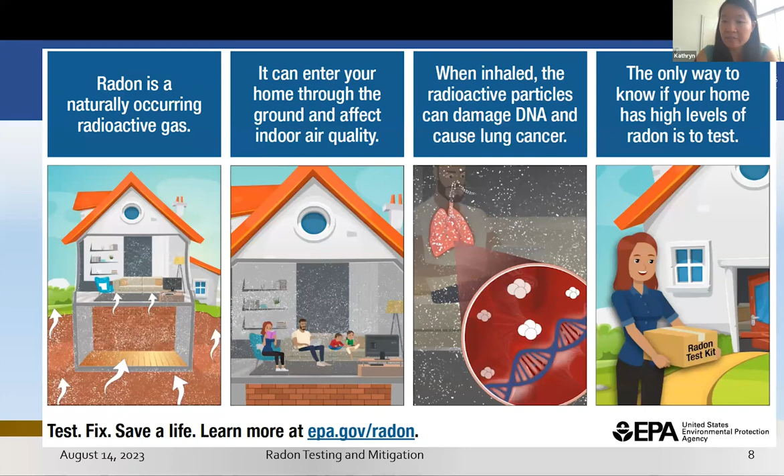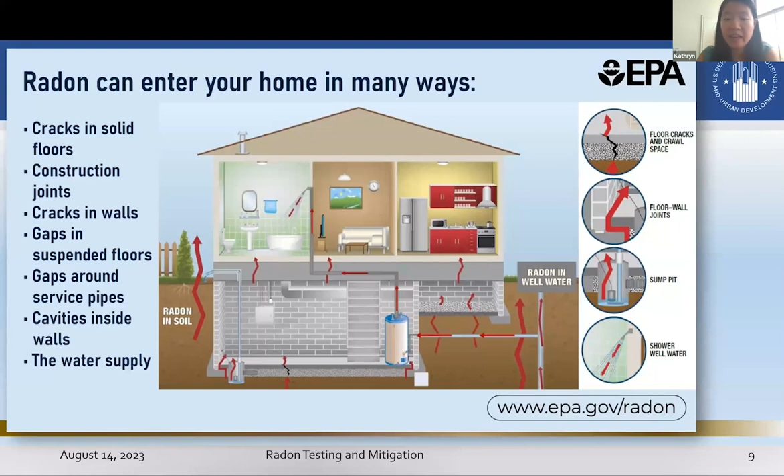How to test for radon. Last time we went over, there are short-term tests, long-term tests, and continuous radon monitors. Short-term and long-term tests can be bought commercially for $20 to $40, including the lab fee. If you buy them in bulk from labs, you can even get it down to under $10 per test.

Continuous radon monitors are professional devices that are much more expensive, upwards of $800, double or triple that, depending on the device and model. The household or layman monitors that you might be able to buy online for $100 to $200, those are not devices that are approved by the National Radon Safety Board or the National Radon Proficiency Program. And so the accuracy of those devices is questionable. And so you wouldn't really want to base your mitigation decisions on those lower cost digital devices.

There are many different technologies for short-term tests and long-term tests, such as alpha track or charcoal canisters, electret ion chambers. They all have their pros and cons. There were a bunch of questions that came in on which ones are more accurate, which ones are better than others, which ones would you choose? And really, you just follow the manufacturer's instructions for operation. Some tests you have to operate for at least 5 to 7 days. Many of them can be affected by humidity and temperature extremes. So just follow the manufacturer instructions and follow the standards that we will go over in today's webinar, and then you will get a more accurate result.

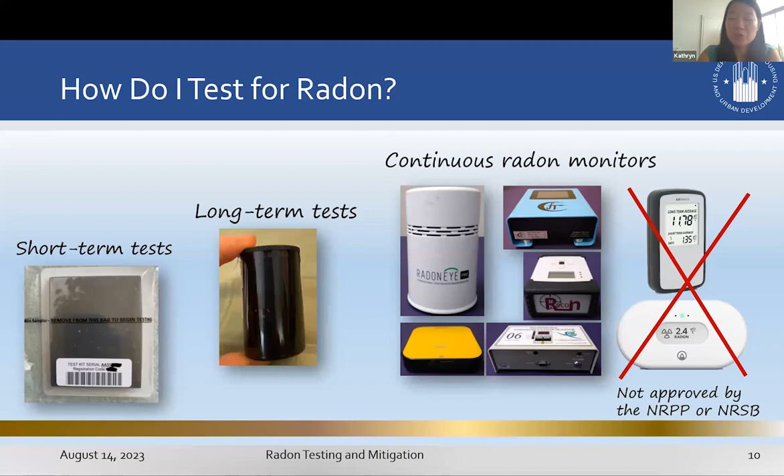What do the results mean? 0 to 2 picocuries per liter, you would just retest every few years. It's basically a normal background level. If you're between 2 to 4 picocuries per liter, you should consider fixing, because at that rate, especially above 2.7 picocuries per liter, is when you start seeing increased risks for lung cancer.

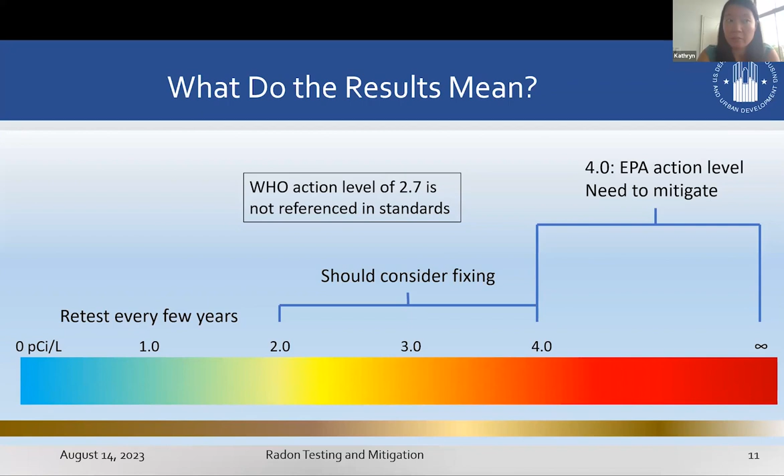The World Health Organization action level of 2.7 is not referenced in the national standards, so you don't need to go by that 2.7 number. It's just something to keep in mind. So you could consider fixing, but you're not required to. And then the EPA action level of 4.0, if you're above 4.0 picocuries per liter, then for health and safety purposes, you should mitigate the building.

Certification bodies that certify testers, mitigators, list approved devices, provide training. There are 2 of them. One is not better than the other. You can do either. That's the National Radon Proficiency Program, or NRPP, and the National Radon Safety Board, NRSB. And then I've included links to a list of approved testing devices that they recommend.

Last webinar, I went over the state radon fact sheets that are provided by Kansas State University's National Radon Program Services. Here is an example of a state radon report card, which is provided by the American Association of Radon Scientists and Technologists. So similar information, just a very short fact sheet, one page with some infographics, really useful on the bottom left, the statewide radon policies.

So, does your state require credentialing to do testing or mitigation? Which standards are in effect? Do you need to notify or disclose to the home buyers or potential home buyers any radon test results, things like that? And you can see here from Minnesota, they basically have requirements for all of them except for school testing and school mitigation.

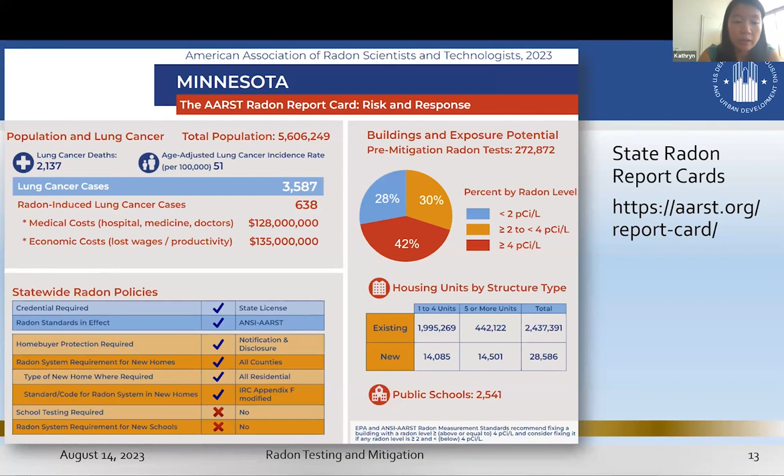Okay, another audience poll just to see if you guys got the most important thing from last webinar. Let's say you live in Savannah, Georgia, which is zone 3 on the EPA map of radon zones. Does this mean that your house will have low radon levels? Yes, so testing isn't necessary, or no, the only way to know is to test. Okay, so most of you got this one.

Great. This is really the most important thing from the last webinar, is that the EPA maps of radon zones are not accurate to an individual house level. They don't really tell you about your individual risk. For some counties or jurisdictions, there has been more research into the development of maps that are more based on soil types and soil uranium sources.

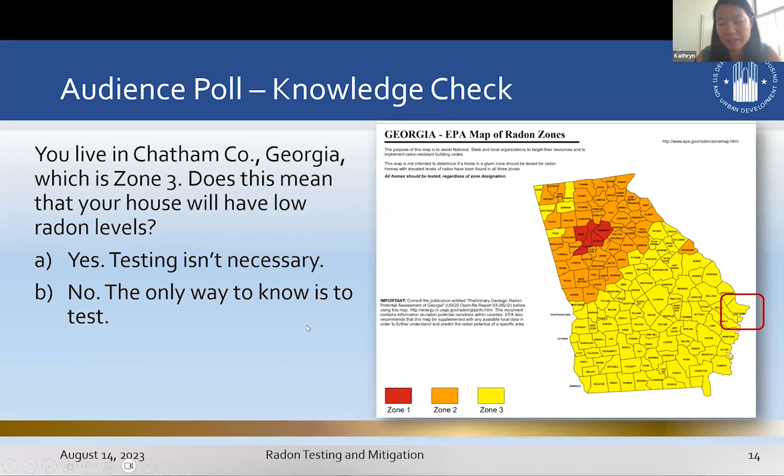And a couple of counties in California or maybe Utah, we saw some examples last time. So that might be better information that you could use, but definitely don't use the EPA radon maps because they're not really based on complete or updated data. And they're also not intended for use to determine individual sites.

Okay, so moving on to today's content. First, industry standards. Industry has developed what we call these voluntary consensus-based standards. And those are standards that are developed using procedures that have a fair and open and transparent process so that anyone who's interested can have a voice and make sure that their expertise and concerns are heard. And yeah, so these are consensus-based.

EPA does not have the authority to set radon standards, but there is a National Technology Transfer and Advancement Act, which directs the federal agencies to adopt these voluntary standards when possible. One example of voluntary standards that you might be familiar with are Energy Star standards. So just shout out to that.

But today's focus will be the ANSI-AARST standards. ANSI is the American National Standards Institute, and they accredit standards. So they basically approve standards. And then AARST is the American Association of Radon Scientists and Technologists, and they're the ones who are putting together and developing these standards. So AARST develops them and ANSI accredits them. And the standards include radon testing, mitigation, and radon-resistant new construction methods for multifamily homes and other large buildings, as well as for homes.

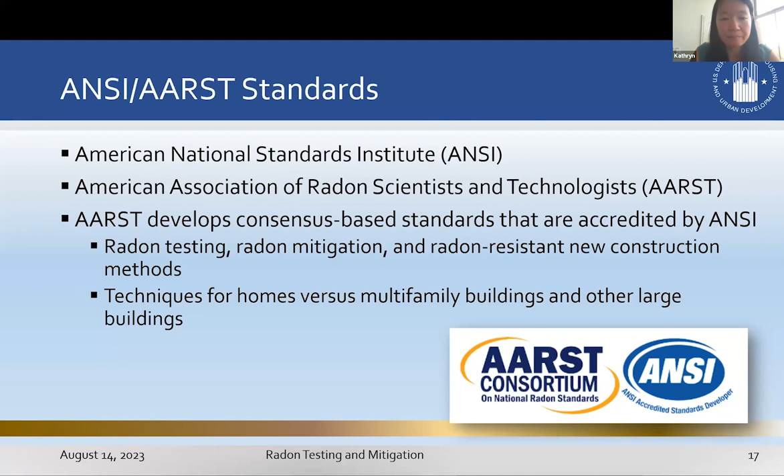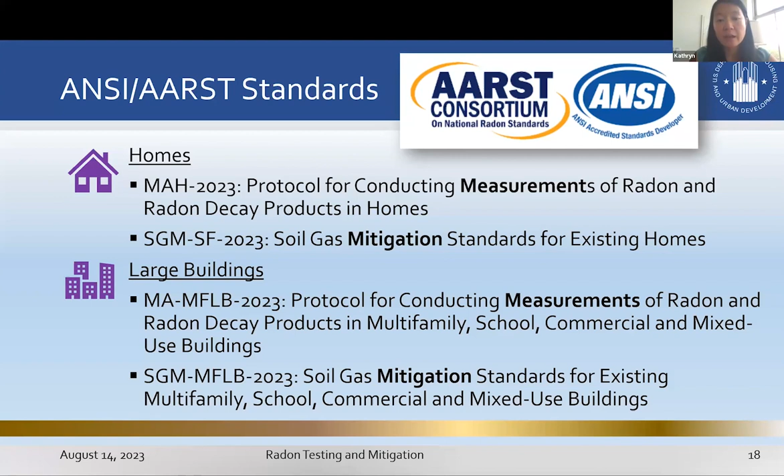You've got testing and mitigation for large buildings, and that includes any multifamily building, as well as non-residential building. They basically lumped them into one standard in the 2023 standards. They also have standards for radon-resistant new construction. So referenced here, you don't need to memorize them. These standards are all available online on the AARST website, and you can view and read them for free. If you want to download or print them, then you would pay a fee.

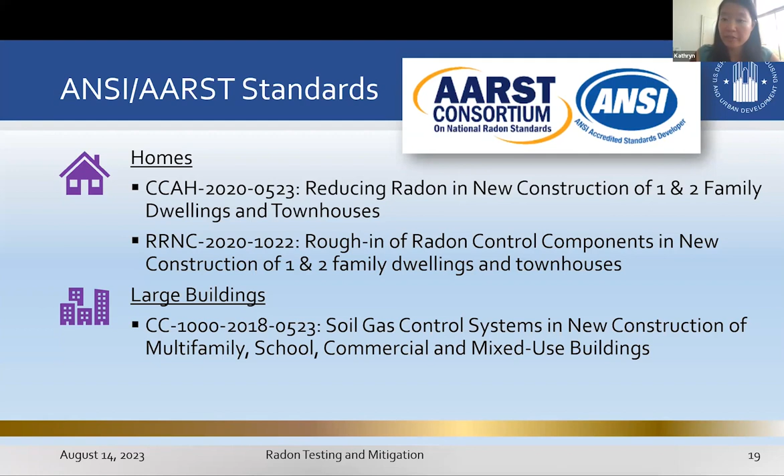Briefly mentioned, there are other standards out there, some legacy standards from EPA, who developed standards back in the 90s for testing, mitigation and new construction, as well as ASTM E2121. But both of them, the EPA and ASTM standards, have not been updated in over a decade. And since 2012, EPA has recommended the use of the ANSI-AARST standards as opposed to the EPA standards.

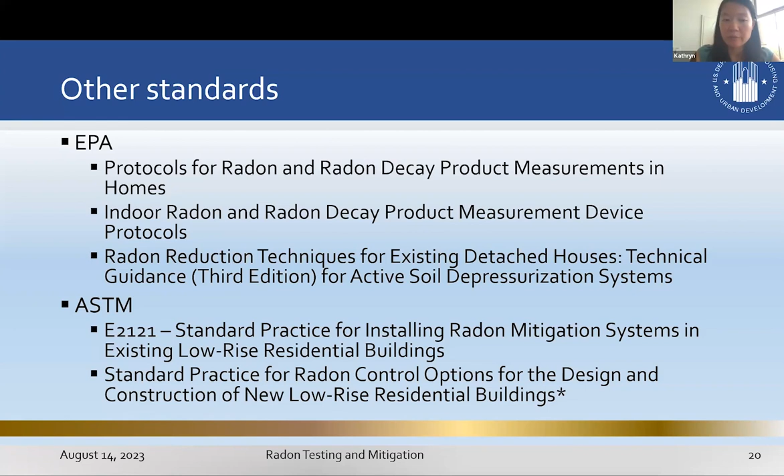So I reference them here because several states still have these other standards as the state requirements. So if you are in one of those states, then you would need a copy of one of these standards, but otherwise the ANSI-AARST standards are what's more widely adopted these days.

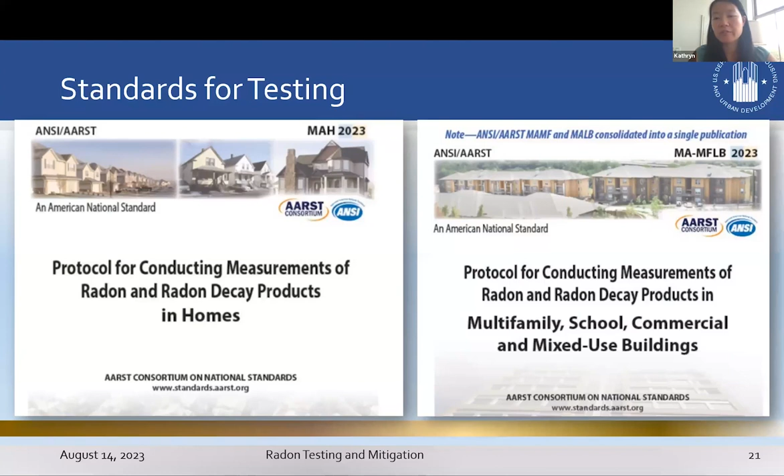Here's what the two standards look like for the testing ones. So single family on the left and multifamily and non-residential on the right. And they're mostly the same. The procedures are mostly the same, with a couple of additional considerations for multifamily, which I will go over.

Okay, so testing. You test existing buildings. We've had several questions come in about, well, I've got undeveloped property. How do I test on vacant undeveloped land? The answer is you don't. I think last time Christina mentioned that you can test the land, but you'll get these really high testing results that will not be correlated with the indoor radon once you have a building built. So really, it's not practical to test vacant land or undeveloped land. You only test an existing building.

When do you test? You can test any time of the year, even though summer tends to have lower radon levels than winter because of increased ventilation with windows and doors open more often. Through following the testing protocols, you can still test any time of the year. Just don't test during severe weather conditions if you're doing a short-term test, because of changes in pressure differentials, low pressure systems, or wind gusts of more than 30 miles per hour, or heavy precipitation.

There's all sorts of types of severe weather conditions, but those different events can affect the radon levels temporarily. So you might get a spike or dip in radon levels due to this severe weather event that really isn't representative of the average annual levels. So don't place a test when severe weather is afoot.

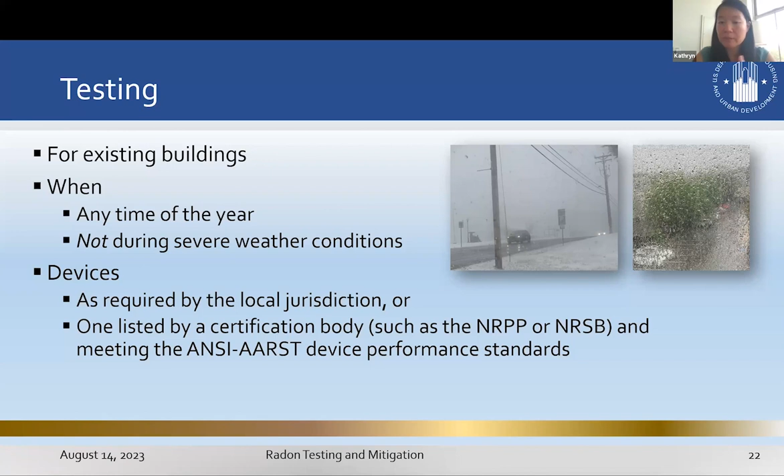And then there are two types of testing protocols. The first one is time-sensitive protocol. That's the one that's more commonly used. That's when decisions are needed in days or weeks. And you use two short-term tests side by side, and then you take the average result.

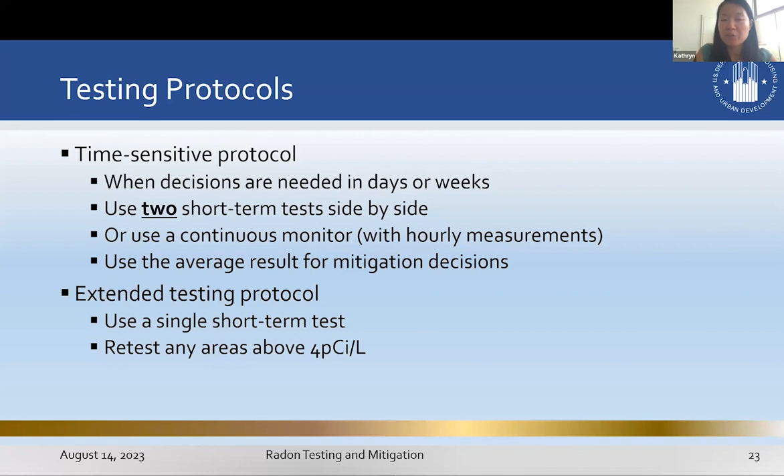Or you could just use a continuous monitor, so those digital devices with the hourly measurements, and then again, use that time average for mitigation decisions. There is an option in the standards to do an extended testing protocol where you start off with a single short-term test and then retest any areas that are above 4 picocuries per liter. And there are reasons that you might use that protocol, but best practice is probably to use a time-sensitive protocol.

Where do you place these tests? Definitely in the lowest level of the home that is or could be occupied. So if you have a finished basement that maybe people sleep in or have an office in, where they really spend any time, or where it could be occupied, then you would want to test in the basement. One test, or for the time-sensitive protocol, you would just do two side-by-side tests.

Additional locations would be necessary if you have a large home that's covering more than a 2,000 square feet footprint. If you have different foundation types, so for some reason the building had one area with the basement, another area that had crawl space, or another area that was concrete slab, then all three of those different areas could have different radon levels. So you'd want to test different foundation types. And especially with larger buildings, if you have any areas that are heated or cooled using different systems, then, depending on what those systems are, you would definitely want to test those separate areas.

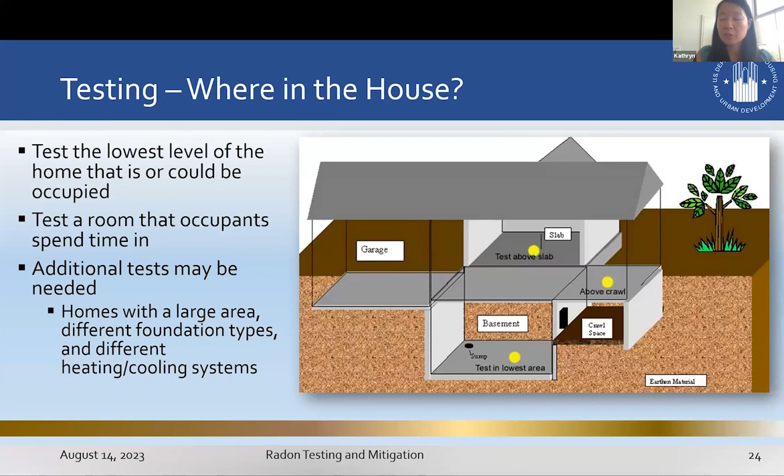For specific placement of the test within a room, you want to be at least 3 feet away from exterior windows and doors, at least 20 inches above the floor, at least 1 foot below the ceiling, at least 1 foot from the exterior wall, 4 to 8 inches away from the other tests. When you're doing the side-by-side test for the time-sensitive protocol, you want them to be close together so that you're basically getting the same reading, but it improves the accuracy when you have 2 of them, right? But they should be 4 to 8 inches apart, not in separate rooms. You also want to put the test somewhere where it won't be disturbed by children or pets, where someone could easily knock them over.

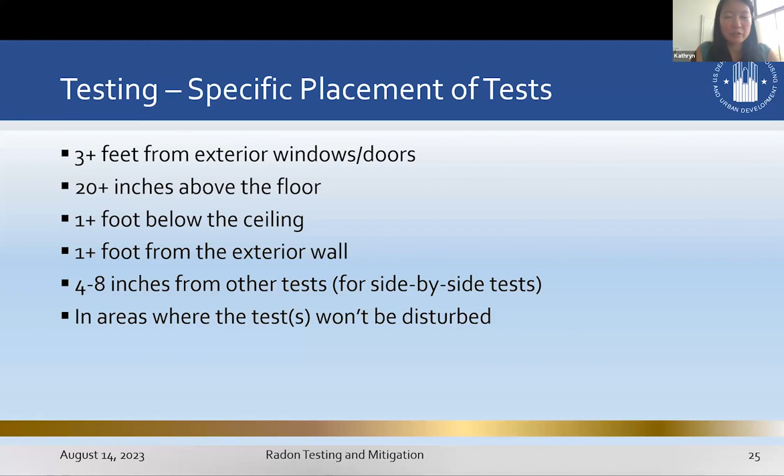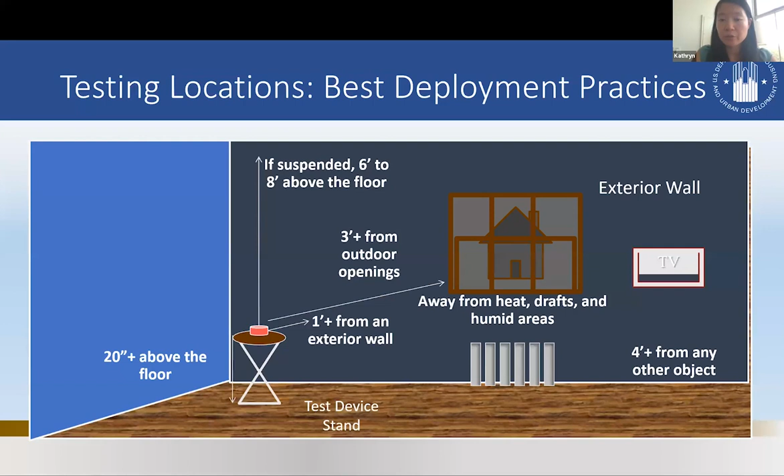Here's a graphic of what that looks like. And basically you want to mimic an airspace that people are going to breathe in. Other than babies crawling on the floor, you're not really going to be breathing on the floor or right below the ceiling. And you want to stay away from anything that could interfere with the test results, such as drafts from windows, things like that. Specific areas not to place the test would be in closets or crawl spaces. No one's occupying those spaces for any appreciable amount of time, so those test results wouldn't really mean anything.

Not in direct sunlight or near heating sources, because as I mentioned earlier, the technology of the tests could get affected by different temperature extremes or humidity conditions. So it could actually damage the test if you put it in direct sunlight, or at least render the reading less accurate. Not near any drafts from fans or vents, because that could just blow air across and, again, artificially lower those radon levels. Not in enclosed humid areas, such as bathrooms, laundry rooms, or isolated kitchens, unless they're open to another room that's occupied for more than 4 hours a day. Humid areas are important to avoid because some of the tests are sensitive to humidity. So again, you might get a false high or low reading if your test is exposed to overly humid areas.

Also, you want to avoid natural stone objects, such as granite countertops, because the stone itself could be a source of radon. I mean, it's not going to be a big source of radon, but being a source of radon would also affect your test, and that might give you an artificially high reading that's not representative of your overall conditions.

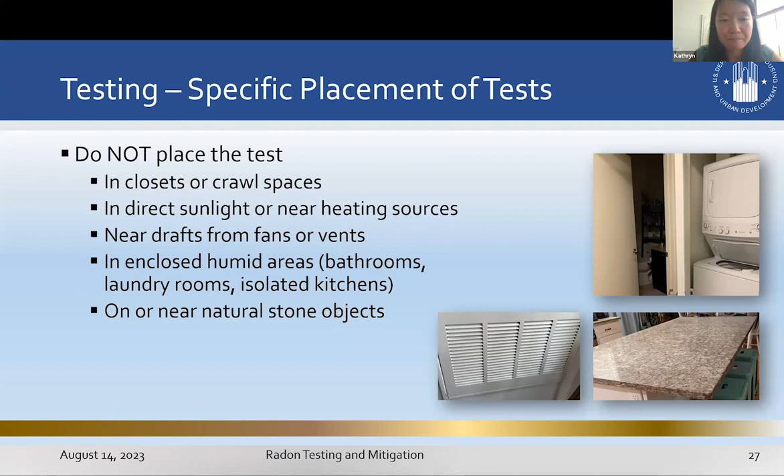And then really important is implementing closed building conditions. This applies to short-term tests, which are between 2 to 90 days. So basically, for the whole duration of the test, you want to keep windows and doors closed. You can still do normal entry and exit, you can't just lock yourself in the house all day, but you want to keep them closed to mimic winter conditions, basically.

Set heating and cooling to 65 to 80 degrees. Set any ventilation with outdoor air to the lowest seasonal level. Avoid excessive operation of bathroom fans or exhaust fans. You can use things normally, put on the bathroom fan for 15 or 30 minutes, that's fine. Run a load of laundry in the clothes dryer, that's fine, but you wouldn't want to run any of these for hours and hours on end during testing.

Do not operate a fireplace or whole house fan, because that will also affect the air circulation or air ventilation throughout the building. If your test duration is going to be less than 72 hours, you want to...

Start these closed building conditions 12 hours before placing the test. That's because it takes at least 12 hours after closing the building envelope in that way for the indoor radon levels to stabilize. So if you're going to test for 65, 70 hours, it's really good practice to close all the windows and implement closed building conditions 12 hours before deploying the tests.

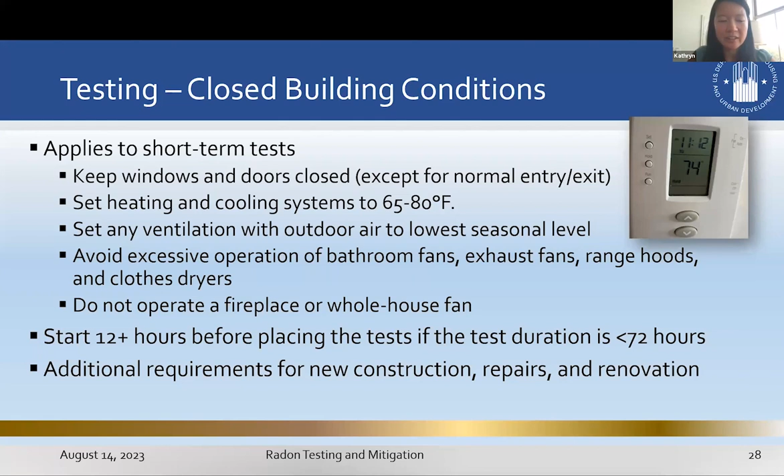If you're testing a home or building that's newly constructed or undergoing renovations or repairs, there are additional requirements for when you conduct the testing. You wouldn't want to test a building that's still under construction or only partially finished. You want to make sure the building envelope you're testing is fully there and representative of the actual conditions when there are occupants.

Things to keep in mind: closed building conditions are really important 12 hours prior to testing for a short, under-72-hour test, but otherwise throughout the whole test period, whether it's 3, 5, or 7 days. Notify your staff and tenants. If you're going to do radon testing, let them know, hey, we are going to conduct radon testing on these days, please note that we may need to access your unit.

There's no cause for alarm, we're just doing a routine test. We'll need access to your unit. We'll have to put this test here so that they know what it is, and they're not going to throw it away or move it to a drawer or someplace it's not supposed to be.

Selecting testing locations, becoming familiar with all the slides before about where you should place your tests. Make sure you give the person doing the tests access to the spaces. And whoever manages or owns the property should also sign a non-interference agreement, agreeing to do their best to maintain these closed building conditions and not tamper with the tests, such as opening the windows or putting it in a closet or somewhere else to artificially lower those results.

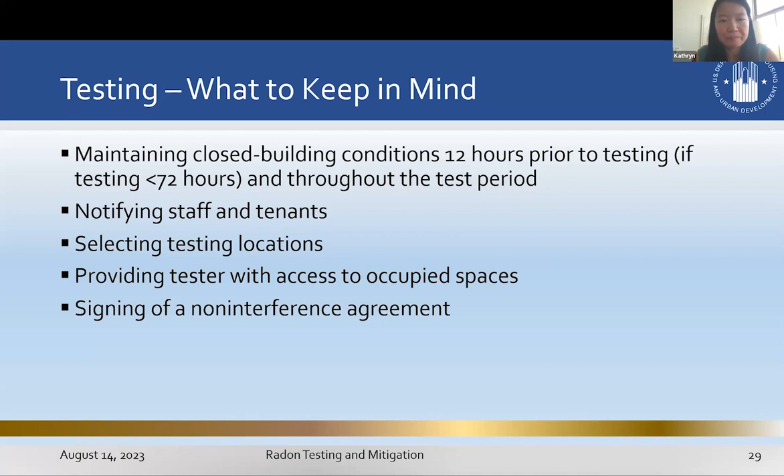Additional considerations for multifamily buildings: you need to test all ground contact units and occupied non-residential rooms, and on each upper level floor, test at least 10% of the units. Don't place tests in hallways, closets, or bathrooms. And if you have a building with large rooms, test every 2,000 square feet for any large rooms, like a big common space or open floor arrangement.

Really important, the tests must be conducted on the same days. If you have a multifamily building or a non-residential building and you need 10 testing locations, you don't come back and do one test on one day that lasts several days, and you don't do it in sequence, you do everything at the same time. That means you might need dozens or hundreds of test kits if you're managing really large buildings.

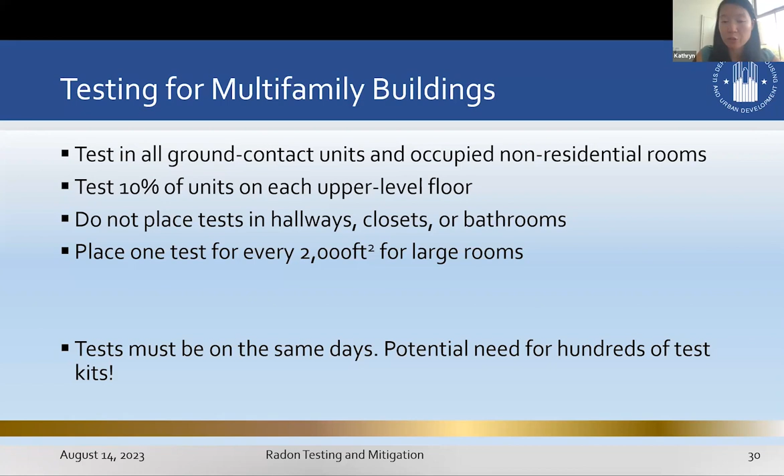So what does that mean for your programs? How do you implement this? Folks have been saying that it costs hundreds of dollars to hire a radon mitigation or radon testing professional, and all your results have been coming out low. So why can't you do this yourself?

One strategy you could consider is training your own staff in testing. There are many courses available and listed on the NRPP and NRSB websites, and I have those links at the back of the presentation.

Just make sure you follow the state requirements for credentialing. Some states don't have credentialing requirements, so anyone can test, but other states require you to be certified, either through a state certification program or by getting NRPP or NRSB credentialing. So make sure you follow the state requirements.

And then at any rate, know the logistics required. So read those standards, study the slides from before, and really know what you're doing and implement best practices. So if you are doing your own tests,

then at least you know that your results are going to be accurate and that you're using industry practices and industry standards. In terms of test devices, again, you can buy kits directly from laboratories in bulk. And if you do that, you can actually save a lot of money purchasing kits. If you're buying hundreds at a time, you can purchase them for probably under $10, and that includes the laboratory fee. If you're more of a program that does homeowner rehab, or you're testing one unit at a time,

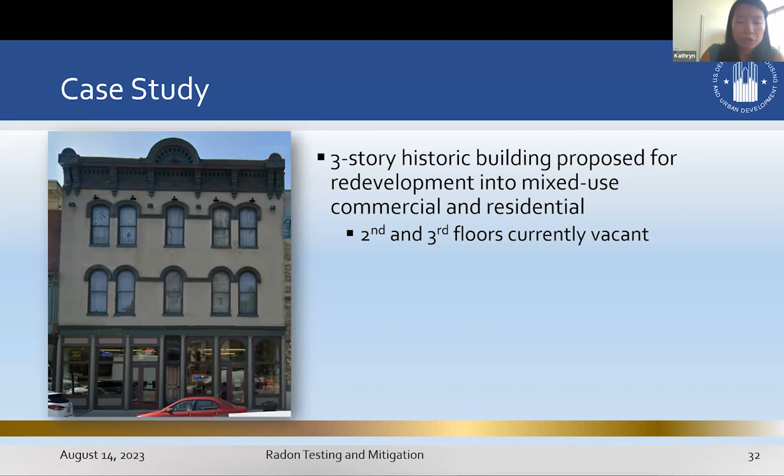So which company, which laboratory, what type of test was used, the method, the location, the address, and then the start and end times for the test. That's pretty standard for what you'll see in a radon report.

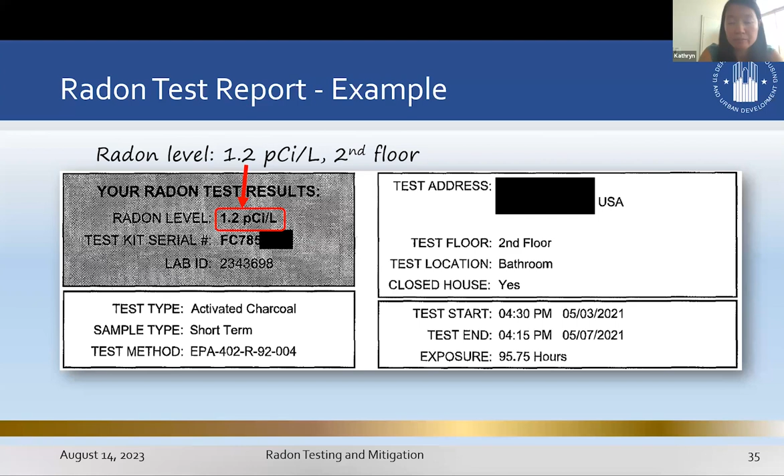Okay, so I have excerpts of the report pasted here for your reference, but the testing procedure did not follow ANSI standards for which of the following: test duration, test location, test type, or closed building conditions. And the hint is all of the information that you need to answer this question is contained in the excerpts that I've included from the report.

All right, so the majority of folks said testing location, but equal amounts of folks said test duration, test type, or closed building conditions. So let's break this down.

I guess from the bottom, closed building conditions, you see where it says closed house, yes, closed house, yes. So I'm assuming that means they did maintain closed building conditions. So that's fine. Test type, activated charcoal, short term. There was the serial number, that's fine.

Test duration, for 2 of the tests it was 70 hours, and for the second floor one it was 95 hours. I'm not sure why they did that discrepancy, but that's more than 2 days, which is the requirement for the standard. And for this type of test, activated charcoal, that's about 3 days. So I might look into whether they followed manufacturer instructions, but that's more based on kit to kit. For what ANSI specifies, there is no minimum beyond two days.

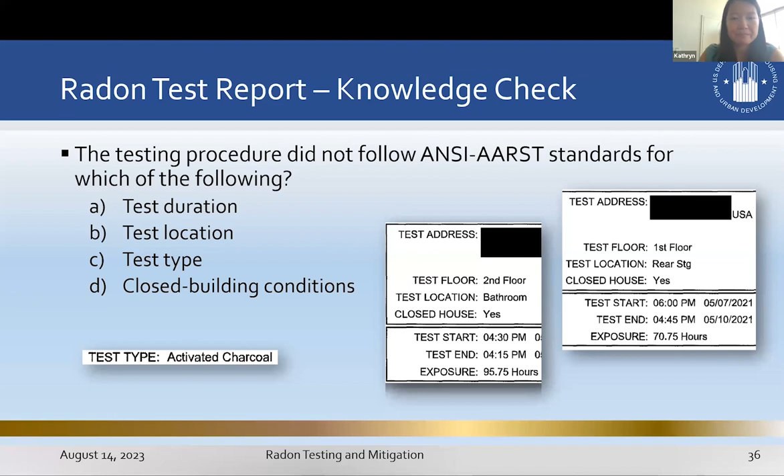At any rate, if we accept the test results as is, what are the next steps for this project? Look into mitigation options. Don't look into mitigation options because the second floor was fine and that's where residential is going. Don't mitigate because no one's occupying the basement, and that's where we got that 8.7 level. Or cancel the project.

Okay, so most of you said look into mitigation options. That's 88% of you, and that's correct. Even though the second floor had a low result, the first floor, which is where the commercial establishments are going to be, had a high level. That was 4.1 picocuries per liter, and that is above the EPA action level. So whatever staff is operating those commercial establishments, they're getting exposed to high levels of radon, and that could be a risk.

The basement, yeah, we don't really care about the basement if it's not an occupied space. But basically, you should look into mitigation because the first floor had high levels. If the mitigation options aren't feasible, or you're in an area where you absolutely cannot find anyone to mitigate, then okay, maybe you would cancel the project.

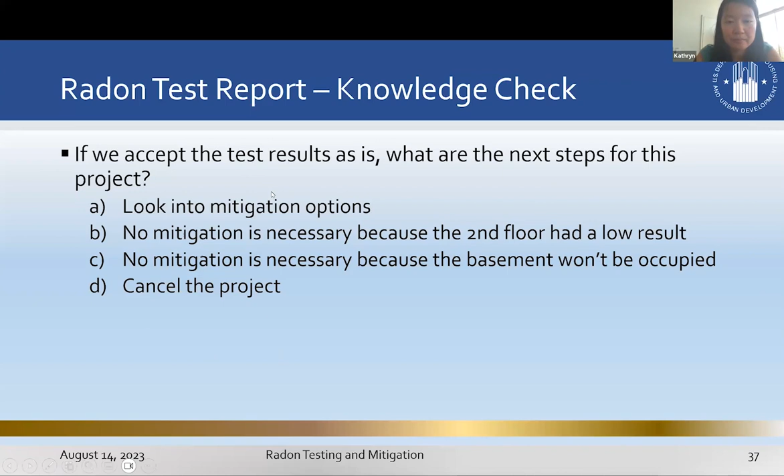Before you hire a contractor, you should check what your state credentialing requirements are, so you know what to expect and what to ask for. It's like, oh, okay, my state has its own certification program, or my state expects any professional to be certified in NRPP or by the NSRB or NRSB. So you know what the state requirements are, and then check for the contractor's credentialing. What are they credentialed in? Are they certified by the national organizations or by the state?

And then, when you're communicating with the contractors, confirm, okay, are you going to use test methods that follow the ANSI-AARST standards, so that we know what to expect? Okay, so that's an overview of the testing standards. Now we'll give a very high level overview of what mitigation and radon-resistant new construction look like. There is one technical term that I'll have to use, but I'll try to keep everything to a minimum. And this is what the mitigation standards look like for ANSI-AARST.

Okay, so the main term here is active soil depressurization. The radon comes from a soil source, and so that's really where we need to focus our efforts on for removing any radon. Different components of the system: you have your suction of subslab soil. So basically you preempt the radon from entering the home by suctioning the radon from the soil beneath the home through a pipe.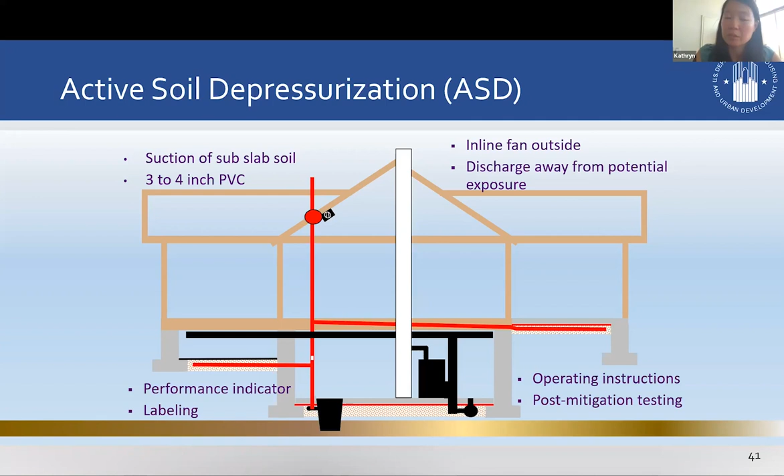And that's going to be like a 3 to 4 inch PVC pipe. There's going to be an inline fan on the outside, and the pipe will vent outside, away from areas that would be occupied by people. The system will have a performance indicator to let you know that the fan is still working, and labeling to show that this is a radon mitigation system as opposed to any other utility pipe. It should come with operating instructions, and after it gets installed, there's also post-mitigation testing that's necessary to make sure that your mitigation is effective and mitigating below 4.0 picocuries per liter.

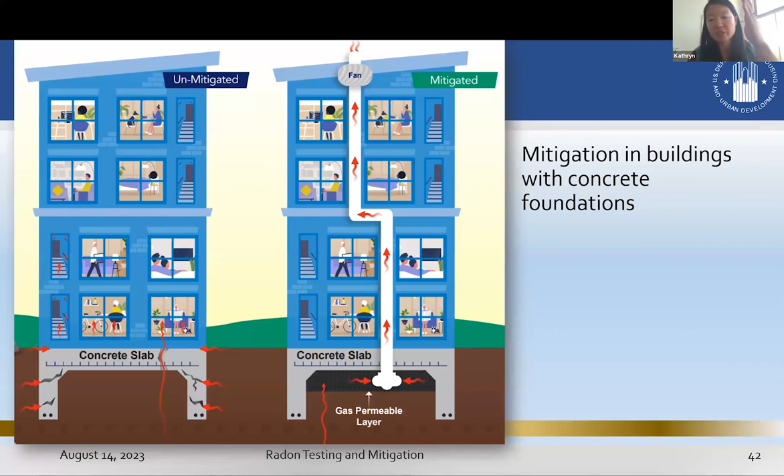Here's what that might look like for buildings with concrete foundations. So the pipe has an opening at the bottom to a gas permeable layer underneath the concrete slab. And then there's a fan at the very top, and it just suctions that air up and out.

For buildings with basements, it basically looks like the same thing, except you're going beneath the basement floor and not the concrete slab, but same thing. You've got a gas permeable layer that the pipe opens out into. There's a fan that suctions the air up, and that radon goes out, up and out. There are other components to mitigation that are complementary to the active soil depressurization systems, so you have sealing and caulking.

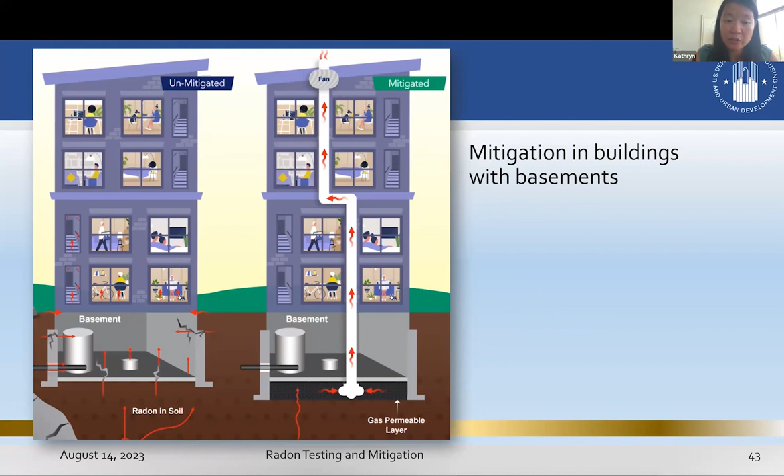In this infographic on the left, you can see all the cracks in the basement and the red arrows showing potential exposure routes. So in addition to having the pipe, you'd want to caulk and seal all those areas so the gas doesn't get in through there. You could also use membranes such as vapor barriers to separate the soil air from getting into the building. But both sealing and caulking and membranes are not standalone strategies. They have to be used along with the active soil depressurization system in order to be effective. Using these alone is not effective by themselves.

There are methods that are non-active soil depressurization, having to do with ventilation systems, soil dilution, air dilution. There are a lot of other ways to mitigate, but that's specific to the building type, the ventilation type, and more applicable to large buildings, so multifamily or non-residential buildings. For homes, you're most of the time going to be using the active soil depressurization we mentioned previously. It's for these large buildings with their own nuances that you might be able to utilize other types of mitigation, but you should definitely consult a radon mitigation professional with expertise in large buildings. Most of the market out there works only with single family homes, so make sure you find someone who knows about installing systems in large buildings.

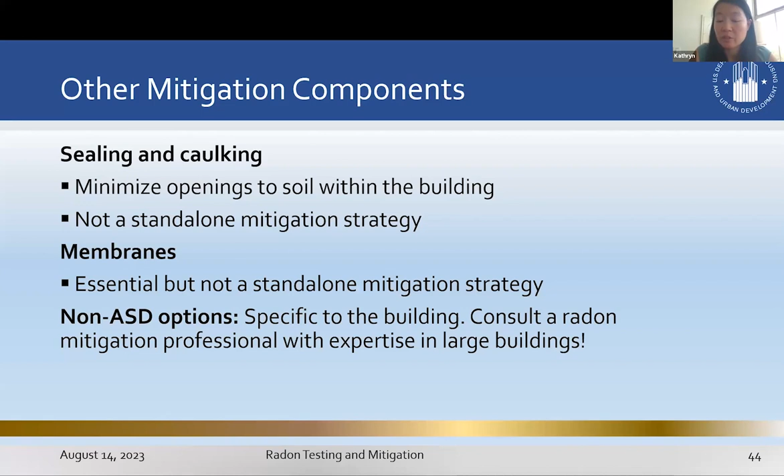Okay, so that was mitigation in a nutshell. Radon resistant new construction is very similar, so hopefully it'll help explain the mitigation if that wasn't clear enough. From bottom up, you have a gas permeable layer, typically at least 4 inches of gravel beneath the home. Then plastic sheeting, that membrane, like the vapor barrier, to separate the radon soil gas from entering the home. You're going to seal and caulk all those areas that the gas could leak up into. Basically very similar to mitigation. You're going to get the vent pipe, and then a junction box in the attic.

This is a passive ventilation system, which means there's no fan, but they're not always 100% effective in reducing radon to under 4 picocuries per liter. So there's always that option to install a fan to make it an active system. And in the attic, you would also install a junction box.

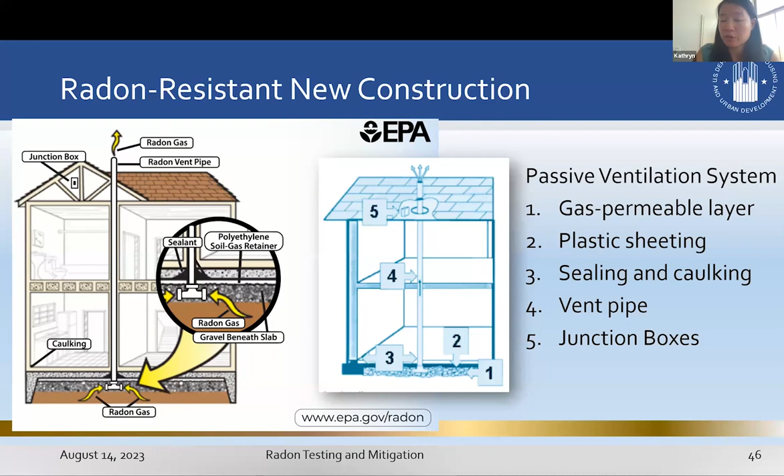Here's just another view of that. These illustrations don't show it well, but the major difference between the passive systems you install with new construction versus the retrofit mitigation options is that the new construction systems are in the interior of the home, away from, at least several feet away from the exterior walls. The photo here sort of shows it in the interior, but still shows it too close to the edge of the home. It looks like it's right next to the wall, but it's actually much more interior, closer to the center of the building. Whereas the retrofit mitigation systems are on the outside of the homes typically.

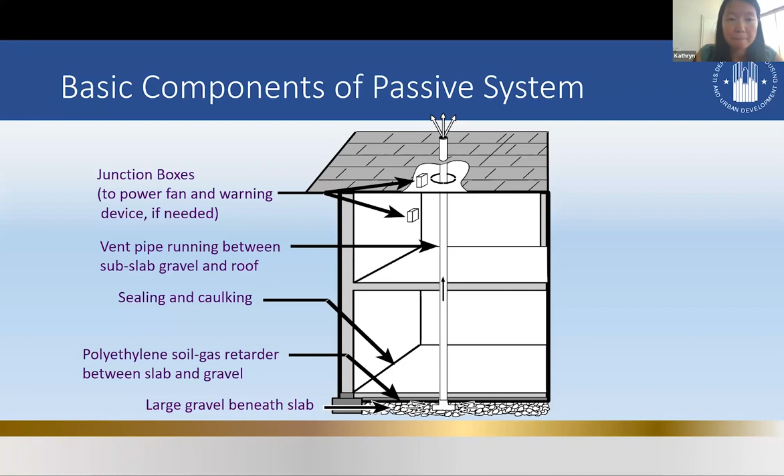So how does that work if you don't have a fan? It basically utilizes the physics principles of the stack effect that Paul mentioned last time, where the house or building indoor air is warming the air in the pipe. So let's say room temperature is causing the air in the pipe to be 70 degrees, and warm air rises versus the air at the bottom in the soil that's closer to 55 degrees, since it's in the ground and the soil is pretty cool. That warm air rises out and pulls cold air up, so there's a continuous rise of that air. That's a passive system. It's not as effective as the active systems, but it's good practice to have in there because it still lowers your radon levels. You always have the option to install a fan. Overall, it will be much cheaper to have this in place already than to try to install one after the fact.

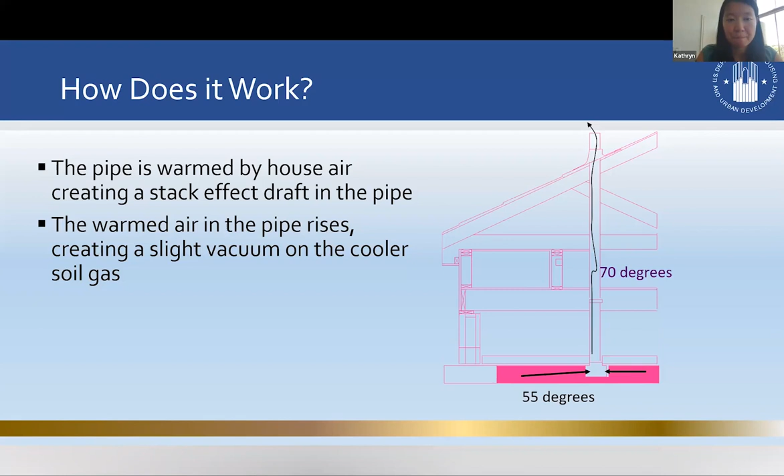Okay, so that was new construction in a nutshell. There are a couple of specifications and requirements for these systems that I want you guys to pay special attention to, especially when you're ordering a mitigation system and consulting with a professional and they give you a proposal for what the system is going to look like. Here are a few things to watch out for in case the professionals aren't following them. These are best practices, but definitely things that are in the standards.

The first one is the exhaust points. The radon gas gets pulled from the soil up and out into the air, so that exhaust point where the gas comes out must be located outdoors. The whole point of having a system is to keep the radon from going indoors, so make sure you're venting that gas outside. The opening point should be at least 10 feet above grade. It should point upward; you can have it 45 degrees upward, and the new 2023 standards allow for 90 degrees if you're at least 20 feet above grade. But in general, you want it blowing upward.

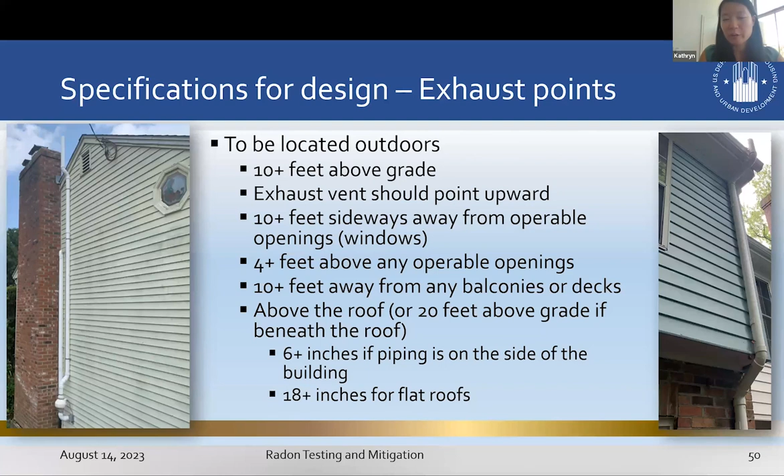It should be above the roof or 20 feet above grade if it's beneath the roof. At least 6 inches above the roof if it's on the side of the building, or 18 inches for flat roofs. I didn't get into all of the requirements, but those are the basic ones. And then for the fan location, it can be in the attic, outside, or in a garage.

When you're considering the location, think about, well, it's a fan, it's operating, there's going to be some level of vibration and noise caused by the fan and the exhaust air. So, make sure it's installed in a place that's not going to be disturbing the occupants. Do not install it in or beneath conditioned or occupiable spaces.

The system should also have an alert or notification system in case the fan fails. It should be an audible or visual alert, or a telemetric system that sends you a message if the fan goes out. And it should be powered separately from the fan. So if electricity to the fan gets cut off, you don't want that alert system to be on the same electricity source.

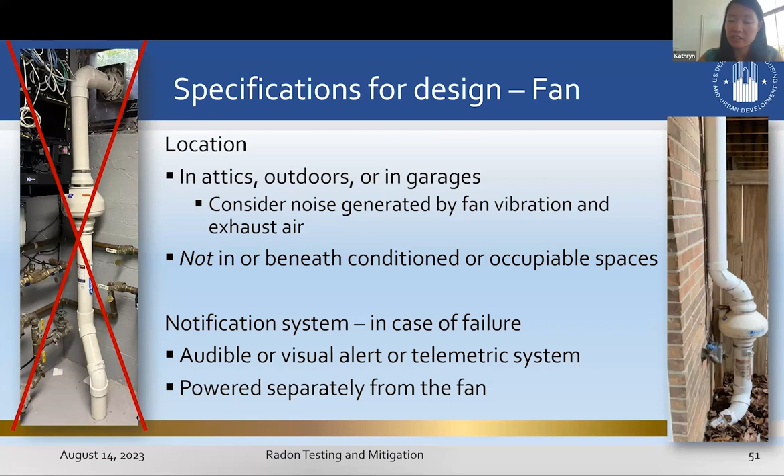Visual alert is very common, and that's going to be in the form of a manometer, which is that U-shaped tube you see in these 3 photos of different colored liquids. One end of the tube opens out to the air, and then the other side opens into the pipe. And the side that connects to the pipe should be higher than the part that connects to the outside.

So in all cases, the levels should be uneven. And if it's uneven, then the fan is working. If it's level, so that the pressure is the same on both sides, then the fan has stopped working and you need to contact the mitigation professional.

Important note, you see these numbers 0, 1, 2, 3, 4. That's not the radon level. This is not a radon test. It does not tell you how much radon there is. It's just showing you if the fan is working. You'll also want to get into the habit of checking this every quarter or every 3 months to make sure that it's working.

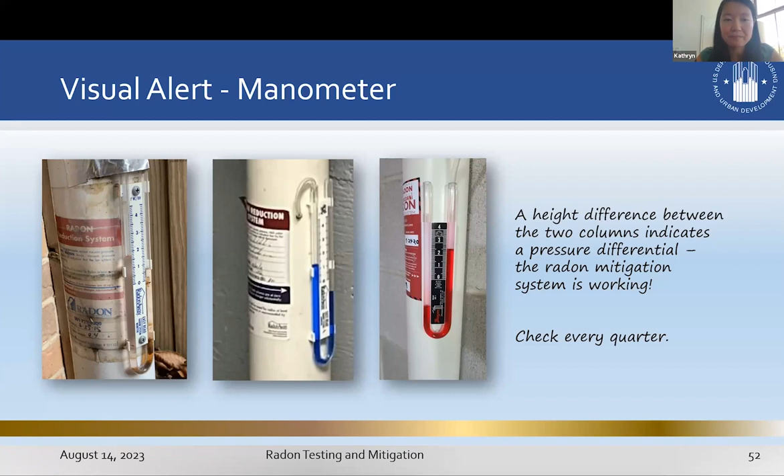Ongoing maintenance of other components. All of your system parts should be clearly labeled, especially any that are inside the home. You see here it says radon fan, or this is a component of a radon system. Do not turn off or disconnect. And so people know exactly what these are for, and they don't accidentally dismantle or change the system, saying, oh, what is this pipe doing here?

And the labels should also include the contact information for the contractor or building manager. And you don't see it in these photos here, but below where I cut off the labels, there are the name and the phone numbers for the mitigation professionals there.

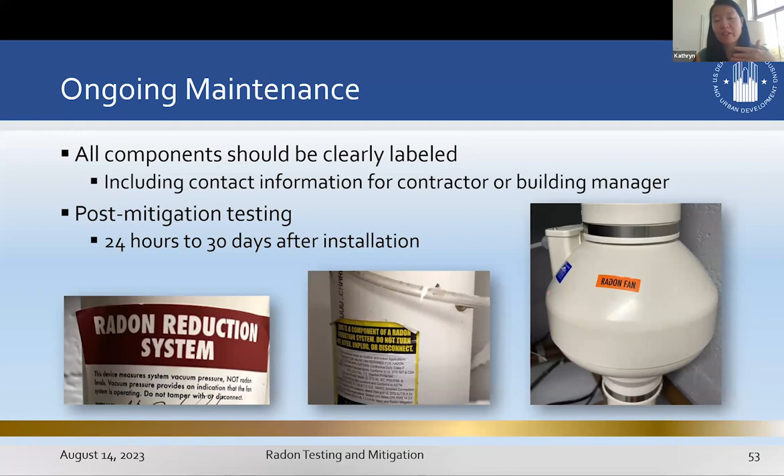Post-mitigation testing. So again, after you install these systems, don't just assume that you're good, that it's working. You want to test the system after 24 hours after installation, but no more than 30 days.

Contractor responsibility. So this is what you as the HUD client should expect from the folks you're hiring to do this mitigation. The contractor is going to provide you with a proposal of how they're going to mitigate and what the design is. That should include an estimate of total ownership costs. So not just parts and labor for this one-time installation, but also over the life of the system based on current electricity rates. And then any future inspections or maintenance, parts replacements, like what's the total ownership cost going to be?

They should notify you of the need to ventilate work areas when they're doing sealing and caulking. The sealants and caulking material tend to have harmful vapors until they're dry. So you want to make sure that they're aware to let you know and to let everyone else know to keep those areas highly ventilated while work is in progress, so that no one gets sick from exposure to the volatile organic compounds in these sealants. They should also be verifying through a visual inspection that, okay, we've installed it, this system is working.

And then finally, they'll prepare for you this binder or information package. If you're a home, or for large buildings, it'll be called an OM&M manual. So that's operations, monitoring, and maintenance manual. Both of them contain the same information. They're just called different things in the standards. And so that should include all of the testing results, testing locations, maybe the floor plan or diagrams of the building, specifications for the mitigation design and mitigation system, ongoing maintenance needs and instructions for how to inspect and what to do.

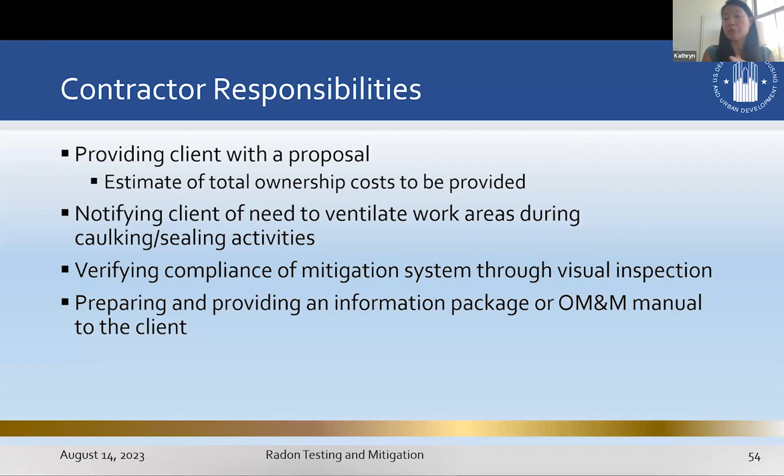And then you as the HUD grantee have responsibilities to provide the contractor with construction drawings and other information about the building layout and foundation materials. Like, don't expect them to just know everything. You should give them a diagram of the layout and let them know, okay, these were the architect drawings, this is how the building design is. And as much as you can, provide that information to them so that they don't need to figure it out themselves. Save time and costs.

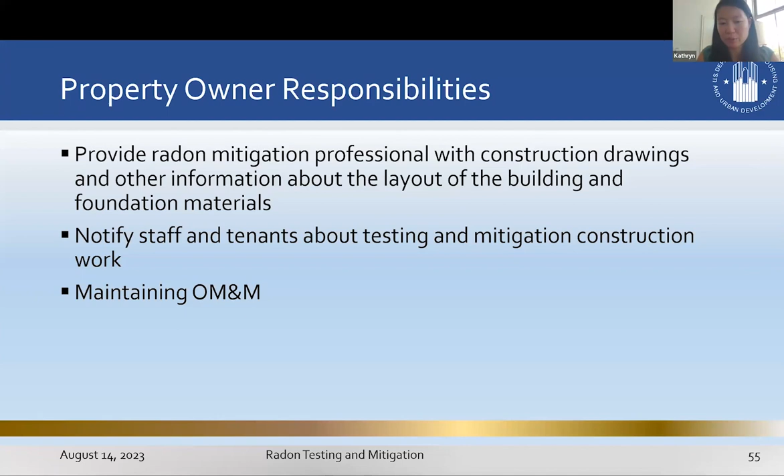Again, very important, notify staff, tenants, and anyone else entering and leaving the building about testing, mitigation, and any construction work, so that they know what's going on, so that they don't interfere or that they don't freak out. Oh no, I've got high radon levels. Just let them know what's happening. And then maintaining this OM&M manual, so that people know what's going on and future staff know where to find that information.

Some additional considerations when mitigating for multifamily or non-residential buildings. Again, there are methods that are not based on that active soil depressurization, but definitely consult with a mitigation professional who knows what they're doing. For that OM&M plan, it includes instructions to conduct a quarterly inspection to verify that the mitigation is still working. I know folks on the last webinar asked, how do I know that this is still working? Like, is this going to still work after 10 years? Well, in the OM&M plan, there are instructions to check, is it still working, in terms of, is the fan still operating? But also, you still need to test. Just because you have a mitigation system doesn't mean that you're good. You still want to test to make sure that things haven't changed.

So when do we test? Every 2 to 5 years. For units or buildings or areas of the building that were mitigated, you would test every 2 years. If the levels were always low, it came out to 1.3 picocuries per liter, okay, great, test again in 5 years. Make sure you follow state requirements in case your state has more stringent requirements. You should also retest anytime you have new additions or do any rehab work on the building, major changes in heating ventilation systems or building envelope.

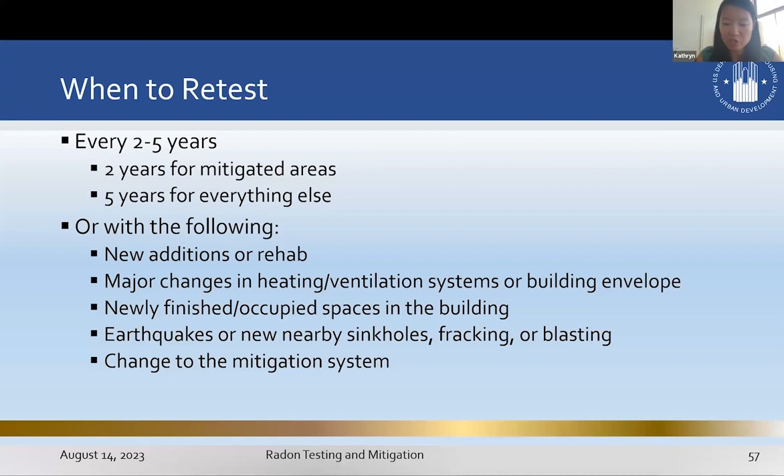If you newly finish an area or there's a newly occupied space, things outside the building, if you have earthquakes or new sinkholes, fracking or blasting, that might affect the geology a little bit, but more so it could damage the home or have more cracks in the foundation and have more pathways of exposure for that radon in the soil. So you want to retest if any of those things happen. Or if there's a change to the mitigation system. Again, you want to verify that those changes make the system still effective.